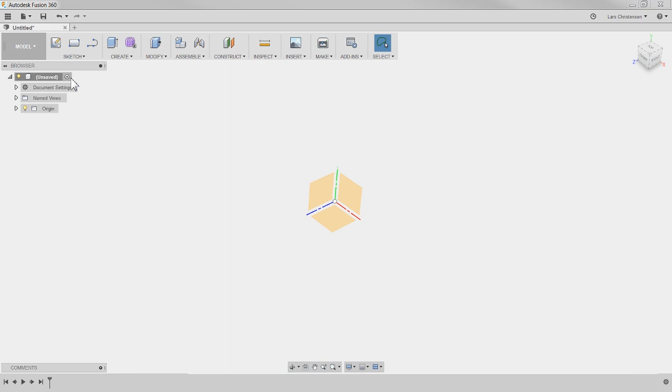So I'm going to start a sketch on one of these planes, and by default it doesn't really matter which one you select - you can do different tricks to rotate them around later on. So I'm just going to start on this plane here.

Click on that, and the first thing I'm going to do is kind of like the outside diameter of this tube here. So I'm just going to sketch a circle, and a way to sketch a circle is just hitting C for circle, just like that. Then you can look next to your cursor - you can see the cursor has a little circle on it. I'm going to snap to the origin.

I'm talking about the importance of the origin - I would always start my first sketch snapped to the origin somehow. So I'm going to left click once, and I can just scroll out, and then I get a diameter showing up. I'm just going to type in 32 - that's what I measured this diameter to be.

When I've done that, you'll see the sketch turns black, because it is what is called fully defined. The reason it's fully defined is we've given it a diameter and snapped to that origin, so it's locked in. You can see when I hover over it, I get a little icon that is a coincident icon with the origin. It's very important that you make sure your sketches turn black. Now to extrude this out in 3D space, I'm going to hit Q on my keyboard.

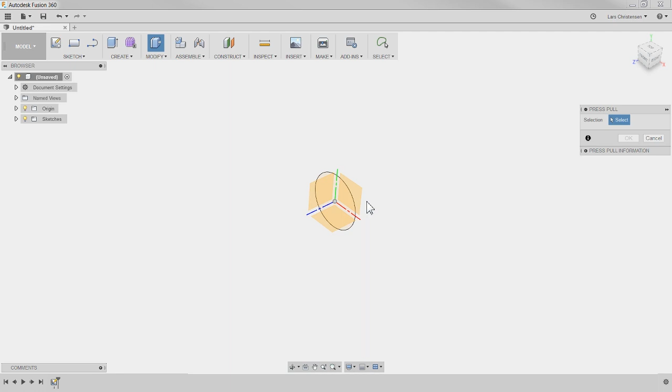That is the same command for press pull. I'm going to select the circle, and every time I see an arrow, I'm normally just dragging it. You will see that now we're getting that 3D shape.

See, we got John here, good to see you. Grant is asking, do I know anything about 3D scanning? I know a little bit about 3D scanning, Grant.

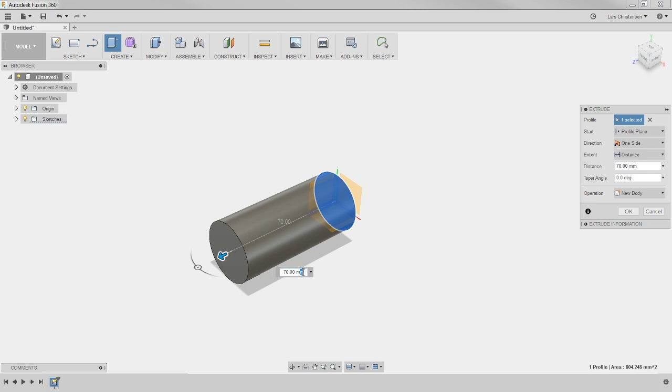You're welcome to ask any questions you have. So, ready for the length here. I measured the overall length. I'm doing the entire length of this one right out of the bat, breaking it down into two things. I'm taking that overall length and putting that in. I measured it to be 145 millimeters. Just type that in, and there you have it, folks.

Hold down Shift, middle mouse button, and we can spin the model around. There you have a tube. Not very exciting, but let's show you here.

Good to see you, I hope I say your name right. So we have a kind of tube here.

Notice down at the bottom here, we get that history, so we can go back. There's our sketch, we first sketched up the circle, and there is our extrusion. At this point you can kind of breathe a little bit, because you got your first thing on the screen. That's always the most important thing, to get one thing on the screen, then you're good to go. Now we're ready to start maybe looking at this mouth.

Now if you're fairly new, making this 45 or 40 degree cut could be a little intimidating. How do you start with that? So what I'm actually going to do is pretend that it's not 40 degrees.

I'm actually just going to create the mouth as if it were flat. Let me just show you what I mean by that, because I want to show you a couple of different tricks. All right, I can see we got Gary here.

Yep, I love to take everyday model items too, Gary, and model them up. It's the easiest thing, actually. Find something around the house and try to start modeling it. I think that's the best way to really learn CAD.

All right, so I'm going to model up this mouth, and if you're looking at it from this end, you can kind of see that the tube diameter kind of runs right out to the edge of that midpoint of the mouth here. So I'm actually going to go into the end point.

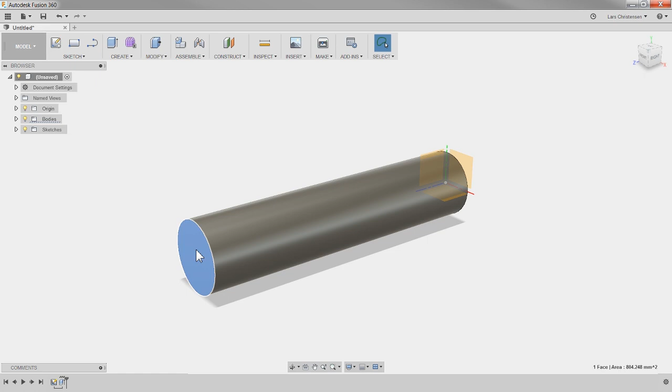So we had our sketch up here on the origin. We can see we still have the planes on. So I'm actually going to start a sketch on this face. I said before that we can only sketch on either a face or a plane. Before we didn't have a face, we only had planes, we had these three planes. Now we have a face, so we can sketch on this face here.

So I'm going to go up and hit create a new sketch, and you can see that the button is kind of clicked in, there's blue around it. I'm going to select right on that face. Now when I click here, left click, you will see that it kind of turned normal to, so now we're looking right at that face. Now this is a brand new sketch. You can see that we had our first sketch with a diameter, we extruded it out, and now we created our next sketch.

One of the best habits I think you can get into is creating helping geometry. So I know I want to snap a line into the top of this circle here, but a circle doesn't really have any endpoint, so it's kind of hard to do. But what I can do is go up and click line, and snap back into our origin just like we did before, and draw a line up.

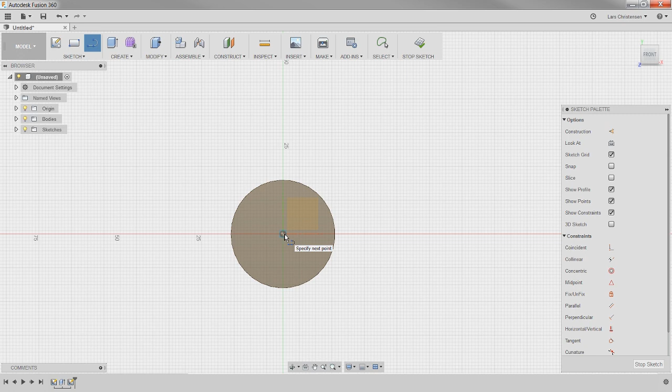You will see that I can make a vertical line up that will snap. You can see how the cursor changes, here's a cross, and then it becomes an X. See that? That X shows you it's going to snap into the top of that.

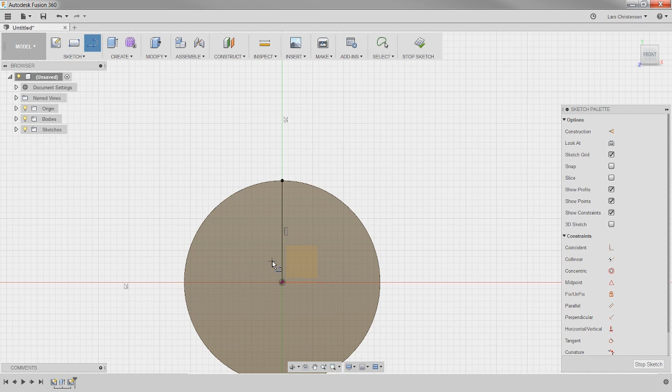So this line that I just drew is kind of a helping line for me for the top of this mouth, or whatever you want to call it. Hey Philip, good to see you, man.

So what I'm going to do here is, I think, an interesting way to do things. I'm just going to sketch a line right out in space out here, just a horizontal line going across, just like that.

Now you can see that it's ready for sketching the next line. I'm just going to hit the little green dot right there so it stops the line. So we just have a line, no length, just sitting out in space. There's nothing exciting about this line at all.

But what I can do is use these relationships down here, constraints, to attach this line to that point we just created. So over here I have something called midpoint. If I click on midpoint, I've activated that midpoint constraint. I click on the line and then click on that point. You will see that this line snaps to the midpoint of the line, snaps to that constraint.

I've talked about it in other live streams before that sometimes it's easier to kind of draw something up a little bit to the side and then attach it with these constraints.

Now, looking at this line right now, you will see that it turns black. And by the way, look at my cursor. You see how I still have a triangle, a midpoint constraint. If I want to get out of that, I can just hit escape on my keyboard. And then I have the white cursor back to the normal cursor.

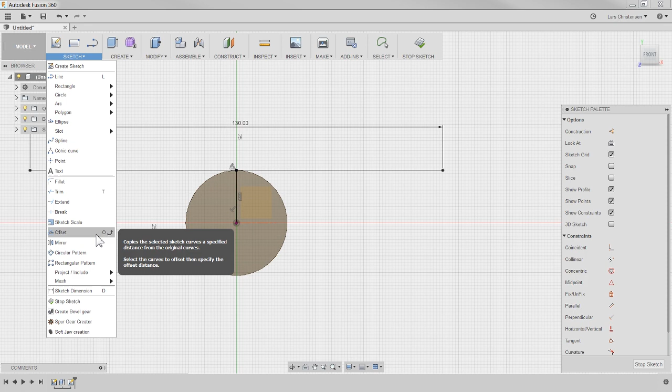One of the things we have, if we go over to the drop-down sketch here, you will see there's an offset command. I know when you're starting out, it's kind of hard to find all these different things. You will see that this one actually has an O next to it for offset, so you can also hit it as a hotkey. But I'm just going to select offset, and I'm going to select my line right here.

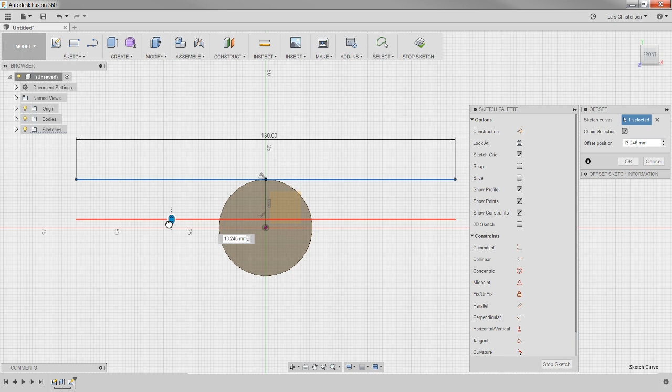Maybe not, hang on. Okay, offset—oh, I was trying to select the dimension, it was this line I was selecting. Sorry. As soon as I do that, you'll see I get an offset line, and like I said, you can drag here, and then you can type in the 20, and that gives us the width. Thank you, Damon. I need another sip of my beer, man.

Okay, so 20 millimeters, hit enter, and now that line has been defined with the 20 here. Now it's open, so I'm just going to hit line, click up here, and just snap into these two endpoints right here, and do the same thing over here.

And as soon as I do that, you can see that when it gets enclosed, notice that it kind of gets—I don't know what you call this, a tan color or something—that shows us this is a closed profile.

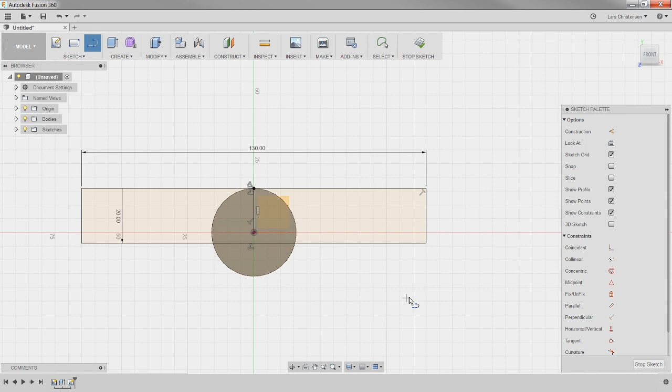Now I'm just going to hold down Shift and middle mouse button and move so you can see where we are right now. So we started out by sketching on this plane, we extruded it out, we start a new sketch on that face, and you will see that face is sitting down there. Again, to rotate, Shift and middle mouse button.

Okay, so this is good, pretty good. We got kind of like the shape of the mouth. Now I'm going to go in and extrude this.

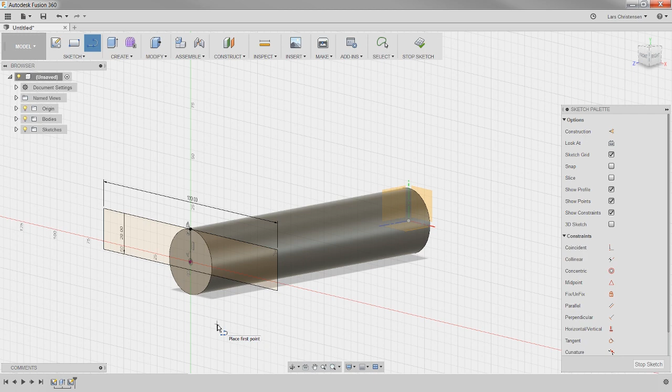So I'm going to hit Q again, and you'll see the software breaks it up into 3 different sections for what I want to select. I'm just going to select the 2 outer shapes I want. And just like before, you can see I get an arrow, and I can drag it one way or drag it the other way.

I hope I'm not the only one just sitting here drinking beer. Maybe I am.

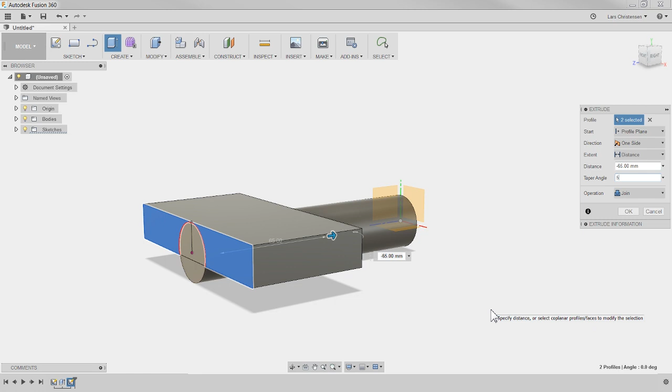Earlier we got a question about adding taper angle to this part here. In the extrude command, there's a tapered function you can activate. This is a good function. However, you'll notice that if I put in, say, 5 degrees, by default everything turns red, which tells me it's a cut. That's the operation type - you can change that back to join.

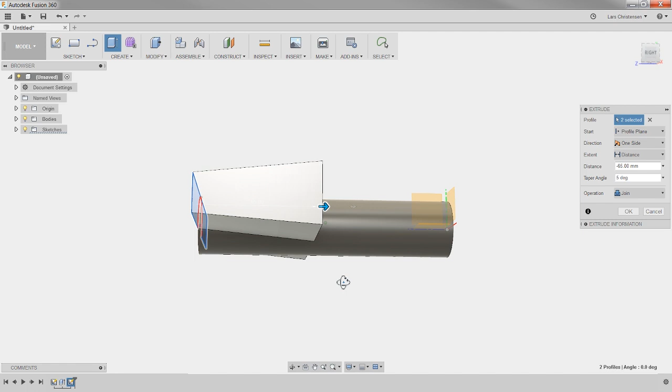But what you'll see happen when I do a taper like that is it applies it to all the faces. If I go -5, it becomes narrow, and you can see it applies to every face it can - on top, on the bottom, even in between. So even though I want to add some taper to the outside of our part, this taper command isn't really great for this, but that's okay.

So I'm just going to turn it back to 0. Now it's all straight, and I'm going to go a little bit further with this one. I should probably measure this - I'm just going to go to about 75, that's probably okay. And I'll hit OK.

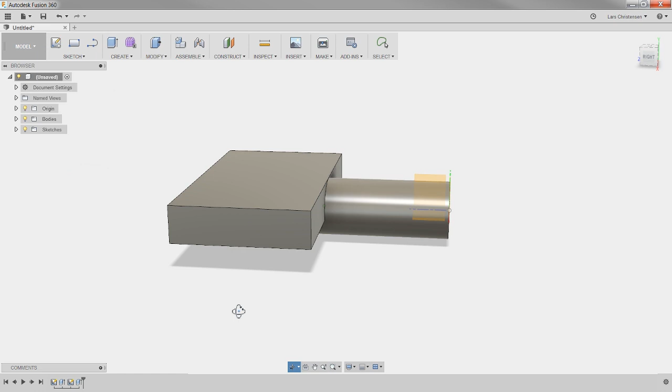So what do we have now? We had a cylinder we extruded forward, then we created that sketch, then we've now extruded a block straight backwards. Now they're attached, the two, because we had the join function.

And you can always go in and edit these - if you right click on them down here at the bottom, you can click edit feature and go back in again. So because we selected join, we joined the 2 pieces together.

Darren just got home. Good, you got home, man. And he got a beer too.

Rob asks: so if I hit C, snap to the origin, and use the mouse button to set the dimension, it stays blue - no lock symbol on the dimensions. But if I enter the diameter and hit enter, the lock icon shows up and the circle turns black. Note to self, use the enter key. Yeah, that's probably a good catch - that's probably something I am doing out of habit.

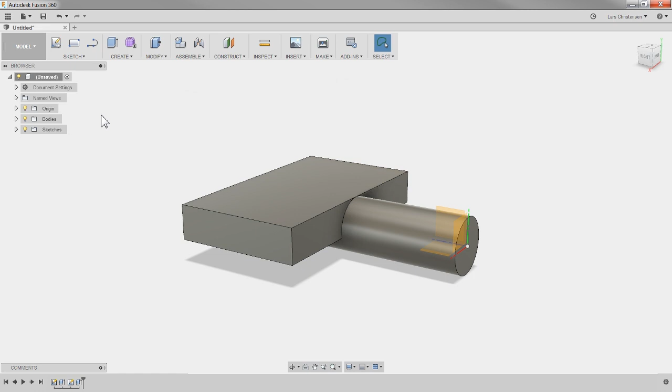So if we go in here, start a new model, start a new sketch on a plane, hit C for circle, make sure you snap into that origin, put in your dimension, and hit enter - you actually have to hit it twice to get it to snap. That's a good note there, Rob.

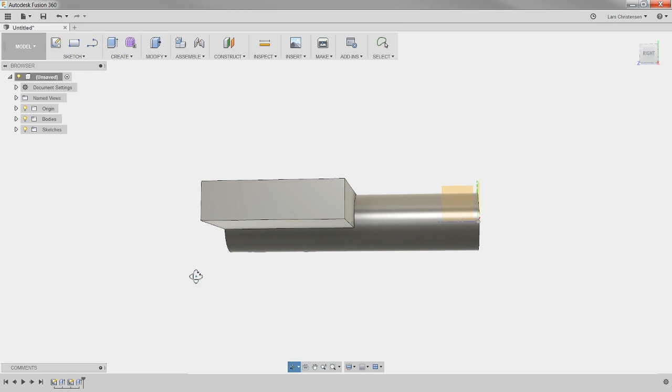Okay, back to our part here. So that's what we have now. It's still what we call one body because the two are kind of joined together. And you have these folders up here - we can talk more about these if you want. If I hit the little arrow, right now we have body 1, but it's these two combined. I'm going to leave it open because a little bit later it's going to become more than one body.

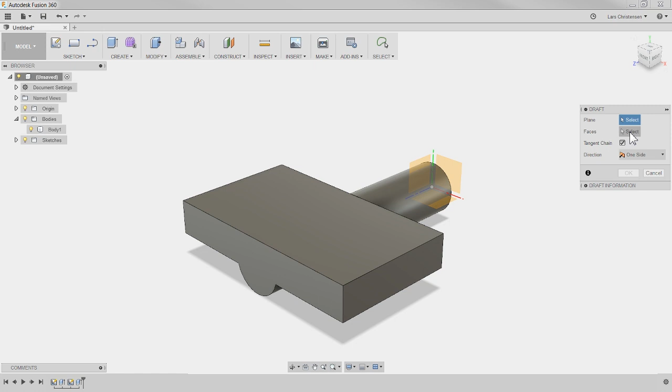Now coming back to the taper portion - I showed before how we could taper things in the extrude, but I didn't really like the result. Be aware that if you go to modify, there's a taper or draft function you can apply there. It does kind of the same thing - taper or draft, it's the same thing. So if I hit draft, it's looking for a plane, or what I'll call a zero surface, where the angle is going to come from, and then you can select the faces you want to apply it to. So where the other function applied it to all the faces, this one we select the zero plane.

I'm going to select this plane back here, and then the faces - I'm going to select this face. Then we just hold down Shift and the middle mouse button and drag around to hit the other face. And now I can actually add a draft just on those 2 faces.

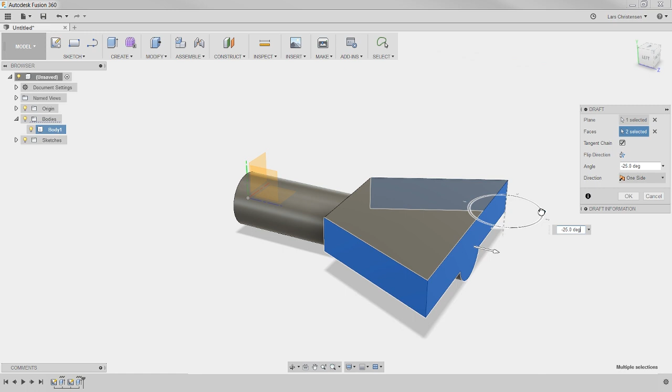So the taper in the extrude can be kind of handy, but if you want to control what side you want to use, then you want to find this draft command instead. I'm going to hit OK, and you will see that now if I spin it around, Shift middle mouse button, we got some draft to the part here. I think that is really useful.

Now you might be tempted right now to start worrying about creating the hole that goes all through the funnel, because right now we kind of have something that looks like something, but I'm actually going to wait with cutting the hole through the part till the very end.

William is asking, while on taper, is there a function command for a standard Morse taper? Well, standard Morse taper, is that 7 degrees? I'm not sure. I have the machinist handbook, I could look it up.

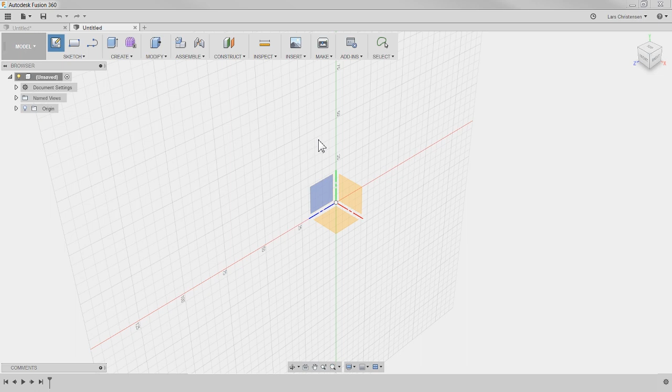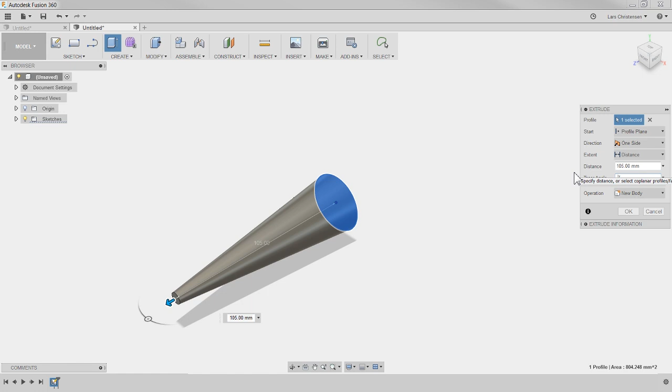So if I open up another document, let's go back and do our circle, C for circle, click here, 32, hit enter, hit E for extrude, and drag this part out. If we added - I think this Morse taper is 7 degrees - if I add in -7, whatever Morse taper is, that would be that.

William says various tables are available. Yeah, that's true, right? Absolutely, you're right. MT1, MT4, yeah right. I think if you're having a drill, is that normally MT3 maybe? I can't remember, but that's how you would have to do it. There's not a command where you can say MT3 and you get that.

You would have to model it up just like this by putting in the taper angle. And then if you did a 2D drawing of this, you probably would have to put a note on it or something like that. Good question, and this is exactly what I want to do with these live streams. Absolutely awesome, fire the questions away, and I'll do my best to answer them. This is absolutely just you and me going through this.

You're the best, William. All right, let's talk about this angle here. There's a couple different ways we could achieve this cut, but I wanted to show you a command I think is really important - a couple commands I want you to know exist, even if when you're modeling the part you're working on, if it's something completely different, sometimes it's hard to see how you'd use it. But it's all about having the right tool belt. So we're going to make that angle there.

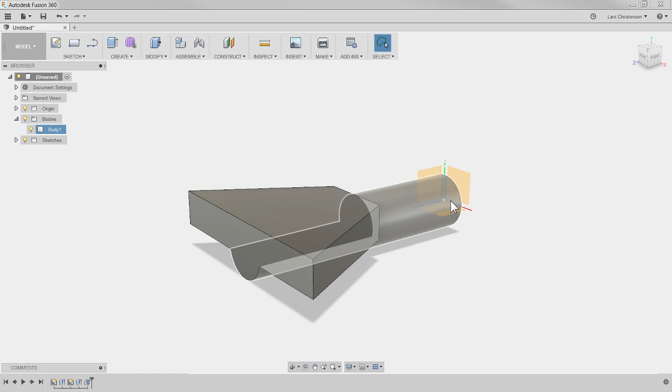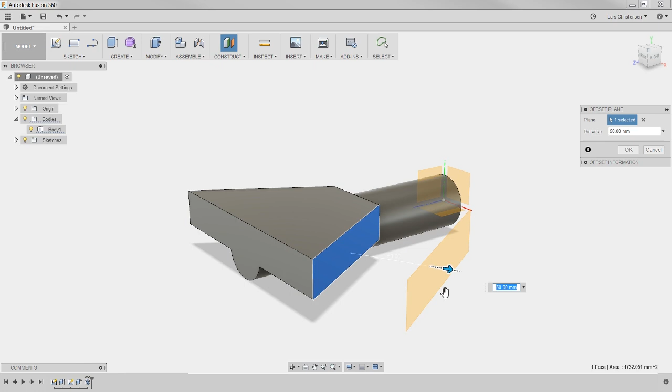Now, I started out talking in the very beginning about using the planes in here. And if you watch any of the other live streams, you know that up here you can create offset planes. So if you can't find a face to model on, and you can't find a plane to model on, you can always create your own. The offset plane up here is pretty useful to have. The way it works: if you select a face, you can create an offset plane from that face. So many times we will use that. But there are other tools in here.

One of them is a plane at an angle, and this is extremely useful. There's a little text box next to it here, to the right of it - hover over it, should give you an explanation. If it comes back up again - of course it doesn't - but what it's looking for, if you select that, it's looking for a line.

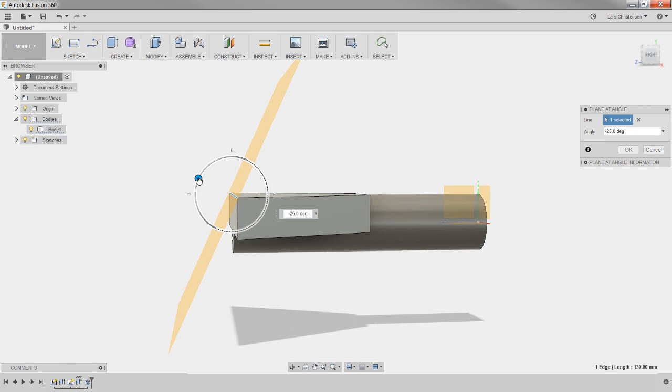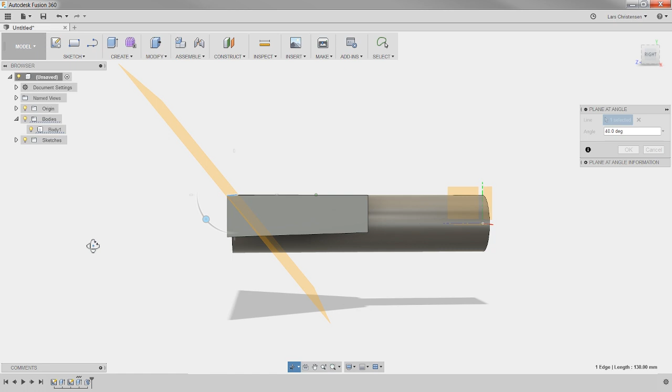Now check this out. If I select that top line of our model right there, it shows up with a plane that actually looks a little bit like an offset plane, but it gives us an option to rotate that plane around that line. This is one of those tools that you can beat yourself up trying to figure out how to do something like this, but that is really a nice tool. So I'm going to place it at 40 degrees here, so it's cutting through there at 40 degrees. You could also type it in here, of course. I'm going to hit OK, and that plane is right there now.

So I would recommend that you take 10 minutes and just - I actually did a live stream on YouTube about this.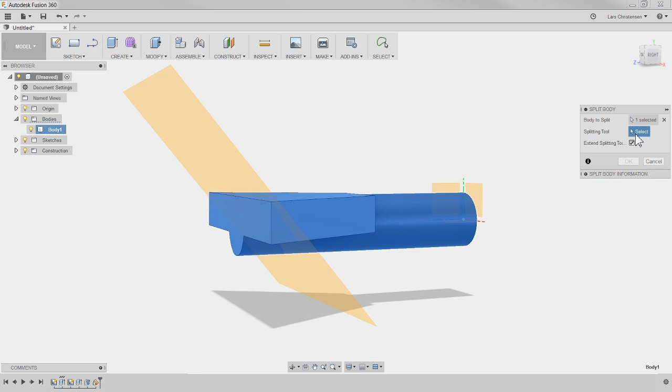Now we can go in and say we want to split that body. It says body to split, so what do you want to split? I want to split this part right here, the body. What is your splitting tool? I click on select to make it blue, meaning it's highlighted. The splitting tool in this case is that plane we just created. You will see that Fusion creates a round boundary shield that goes through that.

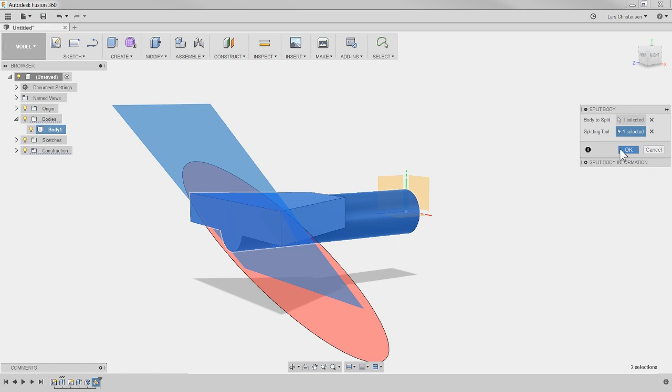When I hit OK, nothing will really change on the screen, but you will see that I'm now getting a second body. So I'm going to hit OK. Like I said, nothing really changed on the screen, but we got two bodies, because we cut right through that body with that plane.

Now, I can hide this construction plane by hitting the light bulb, and that goes away. You can actually see that we do get a little bit of a line segment here.

Now, you might be tempted to delete this, to right click on it and hit delete. But if you do that, notice what happened. Everything kind of went back to where it was before we cut it. Wait a second. Let me just undo that, hit the undo up here in the upper left. So now we're back to where we were before, two bodies.

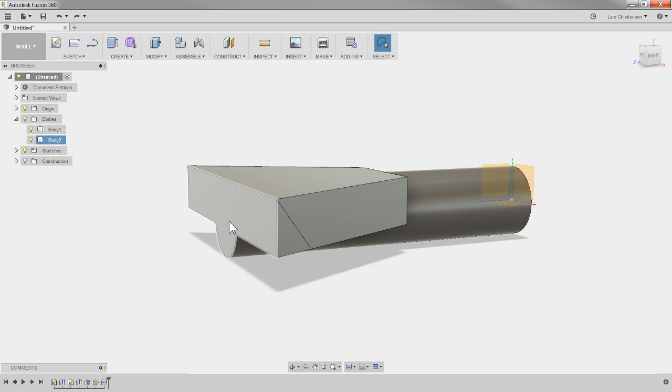So you have a tendency to look at this and say, I don't want this body, body number 2, we don't want that, it's waste. Right click and hit delete. But then it's like nothing ever happened, like all that work for nothing. What the heck? Undo again.

What delete does, and it's actually pretty sweet, is Fusion looks at the feature you're trying to delete, in this case this body, and it says how can I heal everything back up. Now in this case it's not really giving us the end result, but if you had a hole and you clicked on the inner face of the hole and hit delete, you will see not only would the hole disappear, everything would merge up. So that's what delete does.

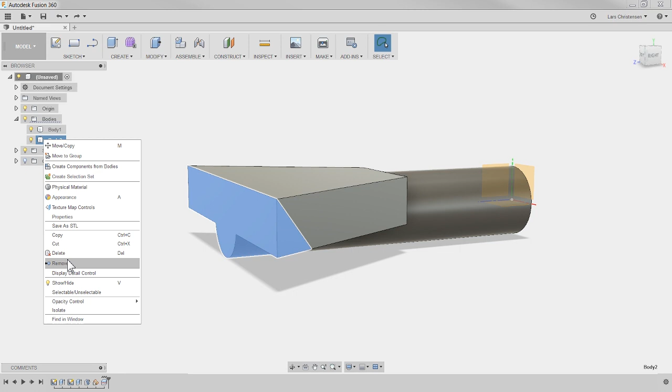So instead of hitting delete, I'm actually going to hit remove. Click that, and now you will see I get what I want. That piece disappeared and we got an angular cut.

And what is neat about this is that it actually shows up here in the feature tree. Here's our split and here is our remove as a feature. So even though we removed it, it's still remembering that. If I roll back before that, it's back. So that's kind of nice that we have this kind of history here.

So we're getting there. This is definitely getting closer to what we want.

Now, the next little trick I want to show you, have a sip of my beer. It is Wednesday evening, 8:35 where I am, so beer is allowed.

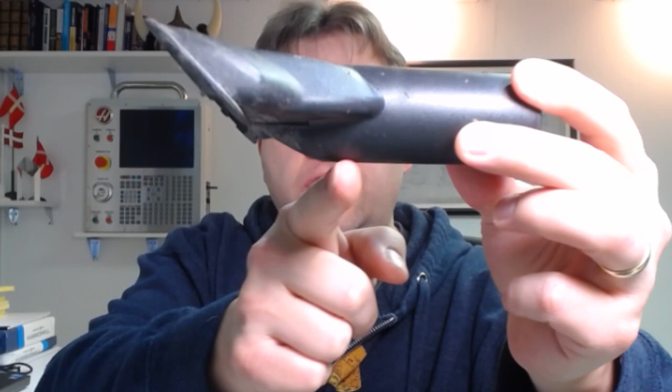Another thing I think it could be interesting to show you how to model is, you see this here, this portion down here has a radius on it. Right now, if you look at our model and go to the side view, you will see that that is kind of part of the cut. So we kind of need to bring that back and bring a radius down a little bit in here.

So this is another one of these that when we're looking at the part with this curve here, that's pretty simple, right? Give me a grinder or something and I'll take that out. But when it comes to modeling it, it becomes a little bit like, okay, how do I do that again? So let's take a look at that.

So what I'm going to do is place myself on this side view here. I kind of like looking at it from the side. And we talked about before, where do you want to sketch? You either sketch on a plane or a face.

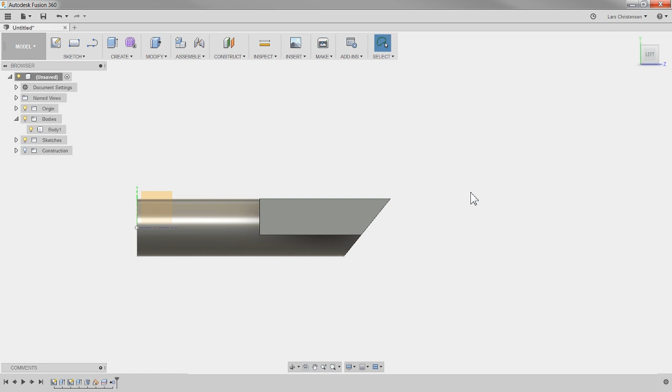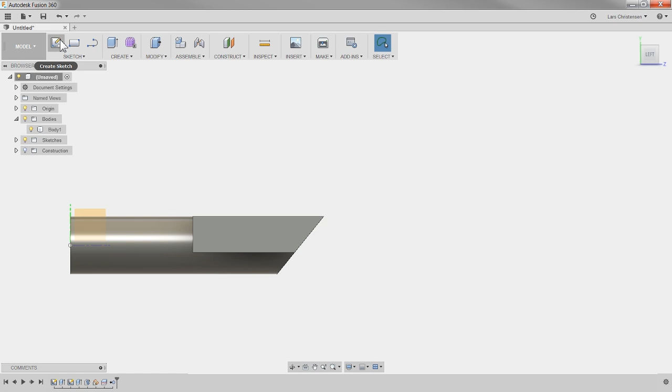Now, because I have a plane from the origin, it's a small plane, only a little small, but it cuts right through the center of our part, I actually think I want to sketch on that. So let me go back to that left view, say I want to create a new sketch, and I'm going to select on that plane. So even though this is a small plane, I can still sketch anywhere I want here.

So that's all good. Now, I want to create an arc that goes from here and kind of goes down to the bottom down here. But the bottom down here is like a development of the roundness going the other way, so there isn't a straight edge down here that I can select.

Well, I'm going to show you one of these tools you need to be familiar with. Project, hit P on your keyboard, and you get this project command. Now, I cannot project this bottom edge because there isn't really any bottom edge, right, because it's a curve. But what I can do is select the two other ends of that curve right there. Just to show you, I selected this edge and this edge.

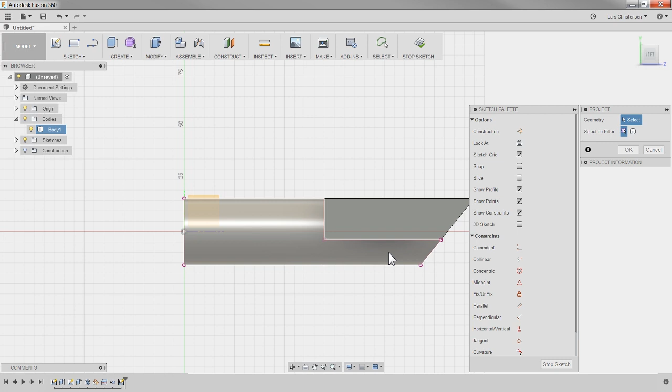And if I hide the body for a second, what I got is a purple line here and a purple line here that I kind of borrowed from that area. And I could also, while I am in project, select this line right here to project that one too. So if I hide the body again, I got that line there.

So I'm borrowing those edges from the body, from the model, and borrowing them into the sketch we are sketching on right now. But these lines for me are really just helping lines, nothing else.

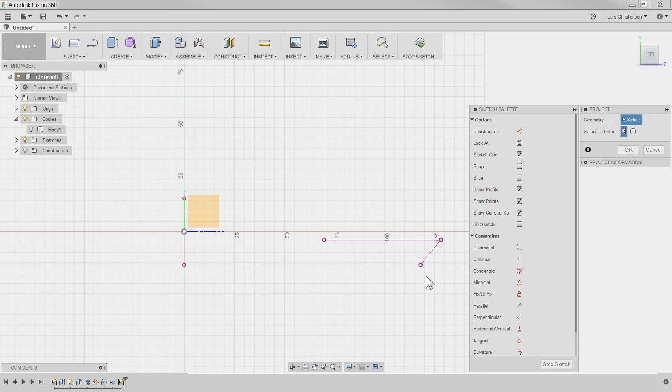So now when I've done the project, I can hit OK to that. I'm still in the sketch command, you can see that because of the sketch palette here. I'm going to close this off, hit L for line, or click on the icon, and just close this off here, just like that. So now we've got that line, and then we're going to create an arc between here.

Now I'm going to go up and click Sketch, go to Arcs, and I'm a big fan of the 3-point arc. The 3-point arc is awesome. You just need to know in what order you should select the points for the 3-point arc.

So the idea is you select the two endpoints and then the curve. So the two endpoints, I'm going to place an endpoint down here, and again, I'm going to make sure my sketch snaps to that line. That's one endpoint. And over here, I'm going to place my second endpoint, and then I kind of get the bow out of this one.

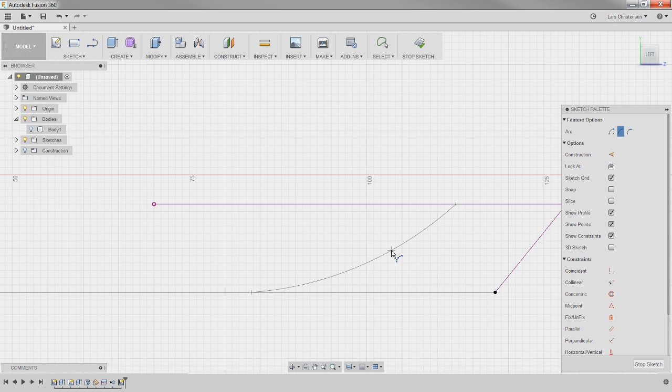Now you will see if I zoom in, if you look at the left side of the arc, the first point I selected, see how I get a little tangent symbol right there as I'm moving it over. And I do want it to be tangent, so I'm just going to click while I have that icon, so left click to place that arc.

Now you will see that though I got a tangency here, the line is still blue, and that's of course because it hasn't been defined. I'm just holding down my left mouse button as I'm dragging this, so I can fully define it.

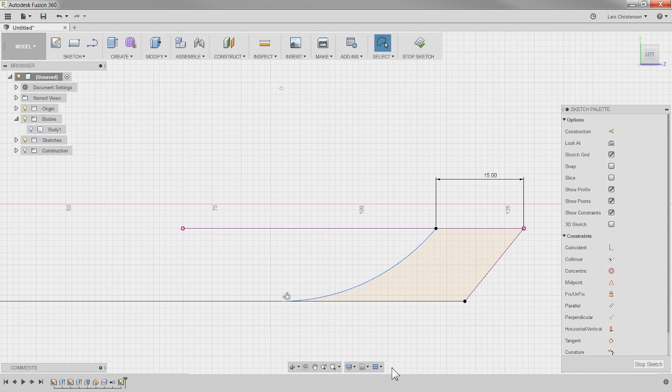So one way could be to say, all right, we need a dimension, so D for dimension, between this endpoint and this endpoint, and I'm just going to make up a number. Let's make it 15. That's good, but you will see that it's still blue. Well, we also need to define the radius of it, so you kind of have to go through this process. I'm going to hit D again, select the arc, and we can now place whatever kind of radius we've got.

So I'm really working in this sketch environment with my body turned off. Now, if I turn the body back on, you can see how this all falls in relationship with our sketch. So now I'm going to hit Q again, and I really want to select that sketch area in there. But notice how my body is kind of hard to select.

I can select it right there. You see how I get the outline right there? If I move over, I get that face. If I move over, I get that face. So sometimes you can sit here and try to see if you can hit it right around there.

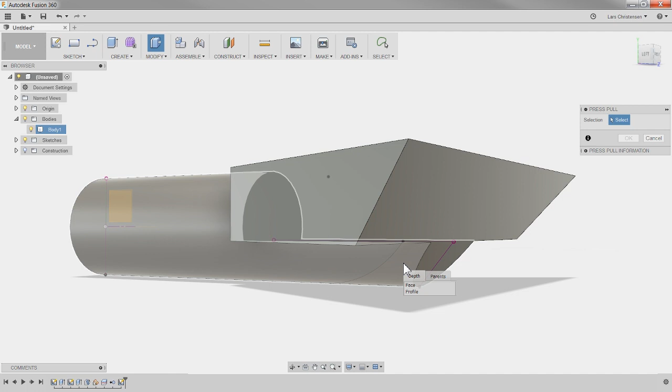Another thing you can do is hover over about where you want it to be, hold down the left mouse button, and you get this little dialog box, and I can select if I want the face or that profile. So that's another little trick.

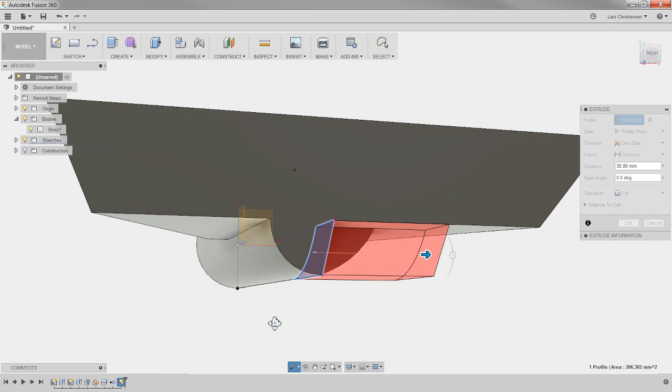So I'm going to select that profile, and you'll see I get a little arrow showing up. Like I said, every time I see an arrow, I drag it, and you'll see we get red, which means we're cutting, which is perfect, but it's actually only cutting in one direction. I want it to also cut over here. So be aware of the different settings.

So over here, instead of one side, I'm going to say symmetrical, and now you'll see it's going to go on both sides, symmetrical cut. Probably give it some kind of distance, maybe 30 might be okay, and hit enter. And now we got a nice curve cut right there, going through there. So we got that kind of curve.

So I hope that this is somewhat useful to see this.

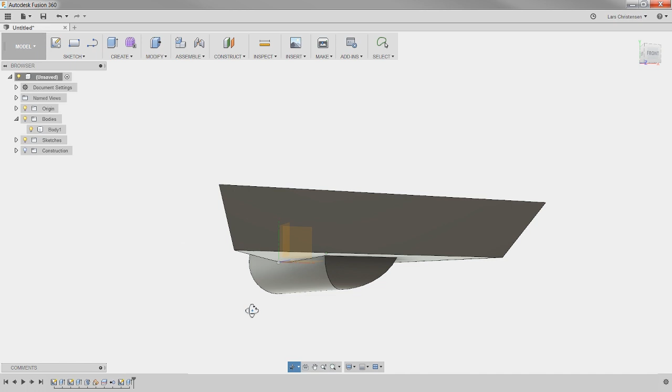The next thing I want to do here, and we're almost done with this part, is add some fillets to the part, just to round the edges. When I do fillets, I normally wait somewhat towards the end. I like to break them down into different sections, because even if you need the same fillets on the entire body, many times customers will come back and ask for certain fillets to be changed.

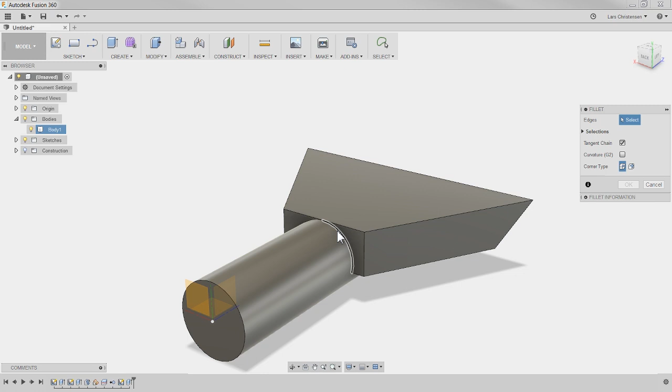So for example, let me show you what I'm talking about. If I go up here to Modify, you'll find Fillet. You could also hit F. So I might select this edge, hold down shift middle mouse button, this edge, and also select this edge and this edge here, and then give it some kind of radius, because these bottom edges and going around this one might get one kind of fillet. So just hit OK to that, and you'll see we get the fillet command down here.

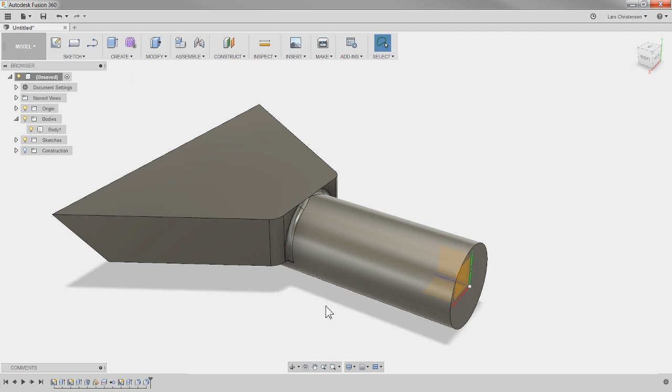And then I will go around and do the other fillet. So maybe another F for fillets, select this edge and this edge over here. Maybe I make those 3, or maybe we make them 6, whatever kind of fits within that. I have a tendency, when doing this kind of stuff, to break down the fillets into multiple commands. It also makes it a little easier for the software to actually solve this. So I'm just going to go around adding some different fillets.

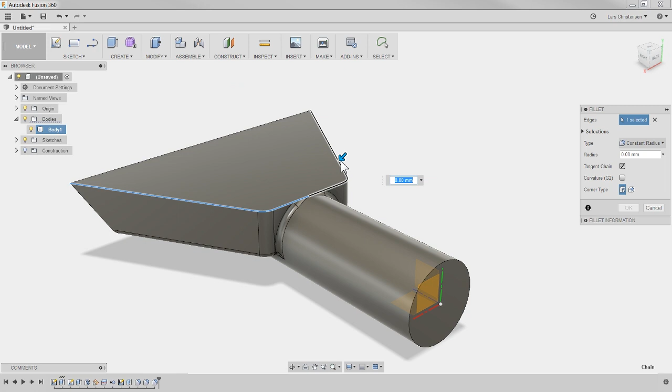F for fillet, maybe select this section and this section. Let's make that also 2. And then we can just leave the rest of them there, because the next thing we got to do to finish this up is add the hole, right?

We got to make the hole. And if you watched last week's live stream here on Facebook, you know what command I'm going to use for this. I am going to use this shell command for this. Now the shell command is pretty cool. Let me just show you first.

If I click on the shell command and I just select this back face here, it gives me a thickness, and I know I need 2mm thickness. And I'm just going to hit OK. What Fusion just did was, by selecting that one face, it added 2mm all the way through the part.

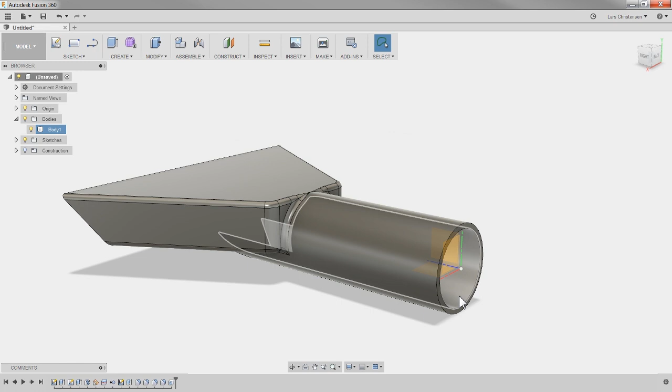I can show you that by going to Inspect, Section Analysis. Let me select the top face here and just make a cut right through there.

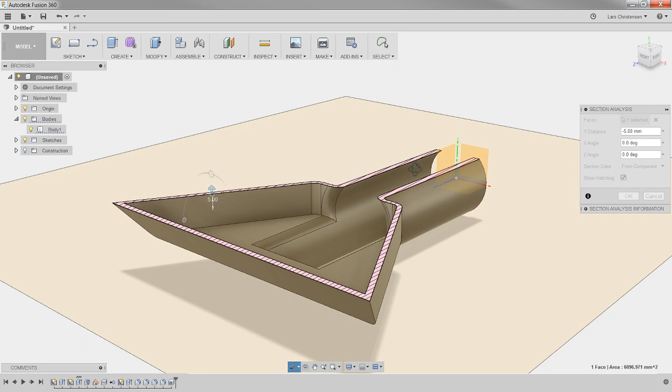Check this out. It literally made a 2mm thick wall all the way around, hollowed it all out. So that's how you will make a bottle, for example, like the beer bottle I'm having next to me, is literally just select the top where you're drinking out of, and everything gets hollowed out of it.

But you can actually select multiple faces. So if I go back into that feature, instead of selecting just that one back face, I can select the second face, and that will actually open everything up. Now we've got that hole right through that. Hit OK, and now we have pretty much our funnel there.

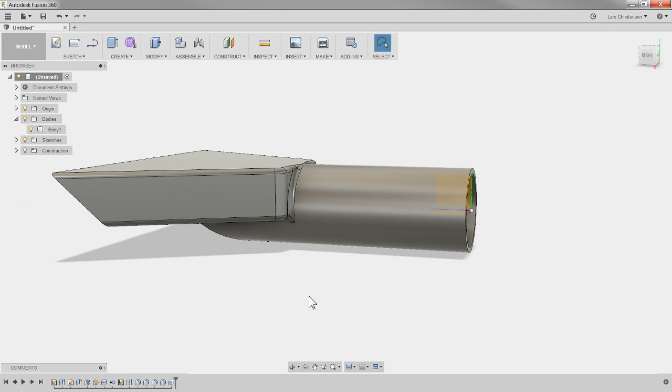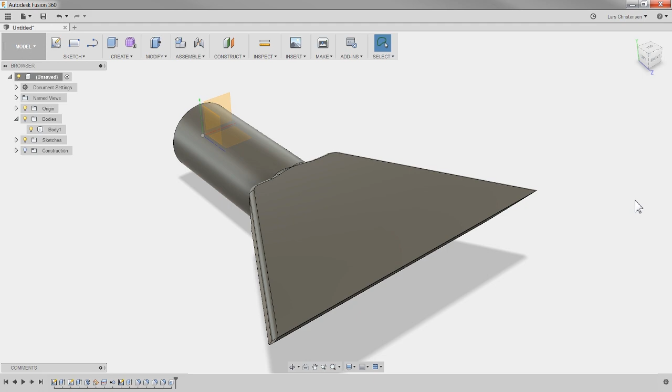One of the things that's pretty cool, hope you can see, is that the radiuses out here are following along with the radiuses inside of it. So it's keeping that constant of 2mm. Let me go back into the section analysis so I can show you again. You can now see it's keeping that 2mm all the way through. It's a really nice command to know, this shelling command.

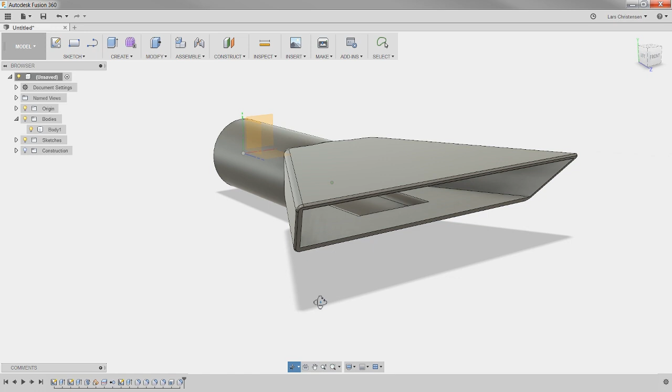The last thing you maybe wanted to do now is add another fillet, adding fillets to the inside or the outside, whatever you like to break those edges down on your part. But really, really nice feature.

Now that section analysis also, I used that top face, but you can actually also select planes. So I can select that center plane, and you can now see half of this part here. So how we just made that curve, now we have the same thing inside of that. That lives over here in the section analysis, you can actually turn the light bulb on and off. Now I'll hit OK to it.

Last thing I'm going to do to this part now is turn the origin off, we don't need that anymore. Right there. And then you could go ahead and add the appearance to it, so we could right click out in space and go change the appearances.

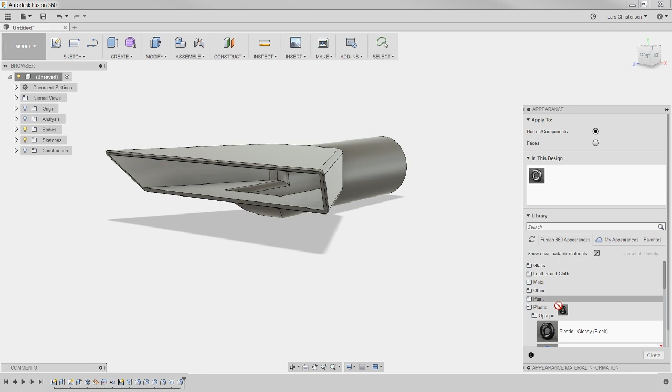You will see there's a lot of different appearances inside of Fusion. I don't know why my menu is so narrow. There's plastic, there's opaque, and we can just drag that up to over our steel here, and we now get that funnel looking like a plastic object that we could do other things with.

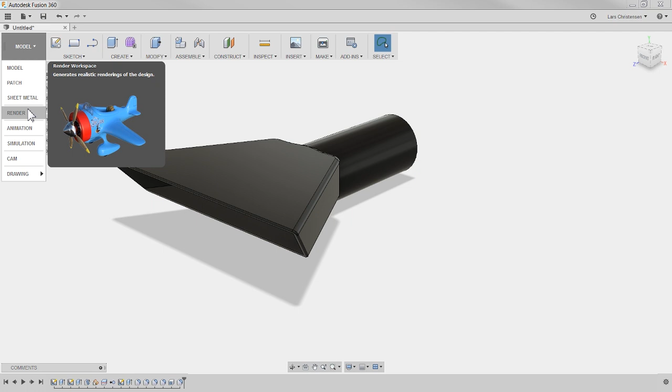We could go into the render environment. I'm not going to do that because that kind of slows my livestream a little, but you could render it out, right, so it looked like real life.

You could also go up to the make menu and go to 3D print. That was kind of the whole idea with this, where you could now refine it to the quality you want. We talked about that last week with STL files, and then you can use your preferred print utility. I prefer Meshmixer, that's what I will normally select. So it's like our model here, and then you could go into the print environment to 3D print that out.

Michael asked a good question: as a best practice, can you have too many sketches? I don't think so, Michael. I really think it depends on what you're trying to model up, because I have seen models where when you open up a sketch there's just way too much going on. So I love this, that's awesome.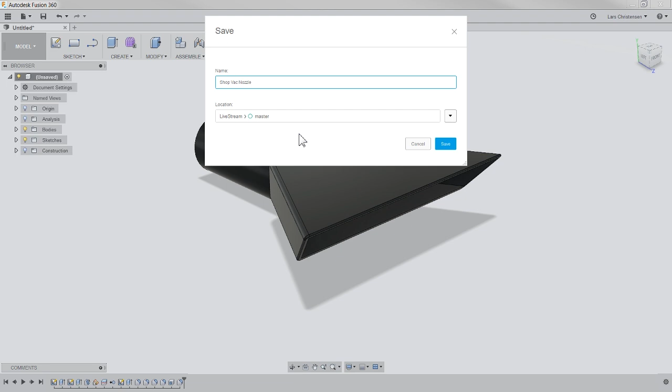So now that we're finished with this one, let's save it. We're going to go up to the save icon, click save, and give it a name, we'll call it shop vac nozzle. I think that's good. We can save it wherever we want in our projects, just going to save it in the livestream one. Hit save, so now it's saved there. If we hit the little 9 boxes out here, you would actually see that I had already modeled one up. I don't need that one anymore, I can right click and delete that.

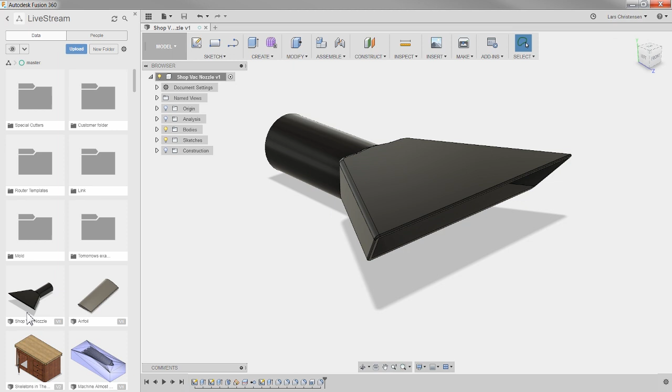So now we have this one saved here. One of the questions I got was how to open these up again. So now I have saved it. Let me just cancel out. To open this one up, we just double click on it and it should open up. Oh yeah, that's what William asked earlier - please close the project and open it up again. So that's how I would do it, save it in there and then you can open it up.

One trick I want to show you - I'm sorry Michael, I'm coming back to your sketch question in a second. If I go out to my root out here, many of you guys are probably like me, that you end up having a lot of different projects and it can be a little bit difficult to do housekeeping.

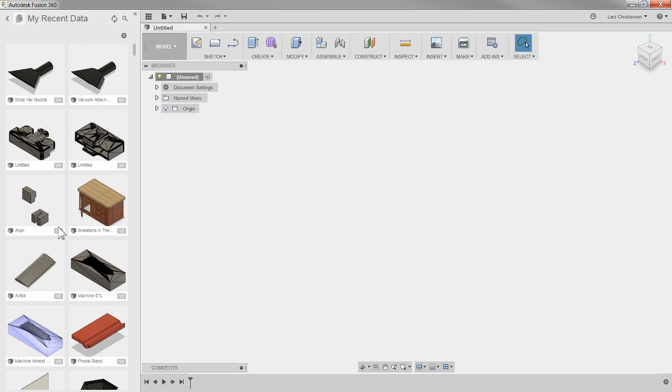Make sure you know that at the top there's a recent data section. I use this one quite a bit, and I know a lot of other people do too. Here you can see the recent files that you have opened. Sometimes it's easier to do it this way than trying to find whatever folder you placed it in. So when you go to open this up, here's our shop vac nozzle. You can either double click on it or right click and say open, and then it should open up.

William was saying it keeps taking him to the browser when he does that. I am not 100% sure about that - send me an email about it, or maybe the better way is to go to Google and type in Fusion 360 support, and then post that to the forum. I'm not quite sure why that is, William.

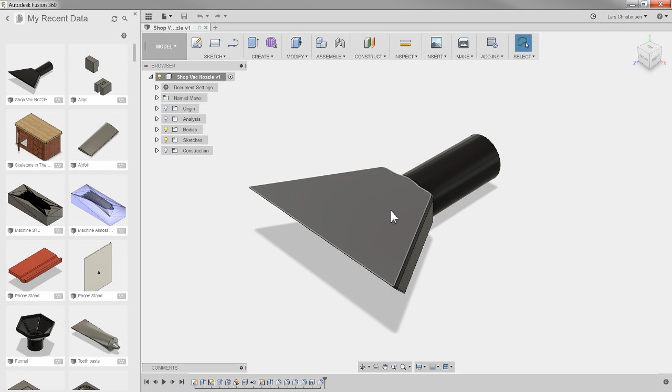So my point is, to go back to Michael's question about too many sketches - this is all great that we modeled up this little shop vac utility here. Now if somebody else gets this model and has to figure out how the heck this was modeled up, that is many times the biggest issue.

If you have a cluttered sketch, and you've never seen this model before, you go to the first sketch. What I many times will do, if I get a model I've never seen before, I will go down here and left click on this one. It's going to take me right back to the beginning, right? And then you can literally play through how it was modeled up. This is going way too fast to see anything, so now we'll just click on this one over here.

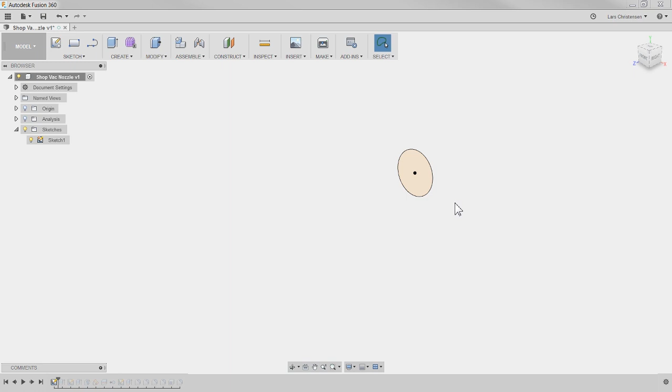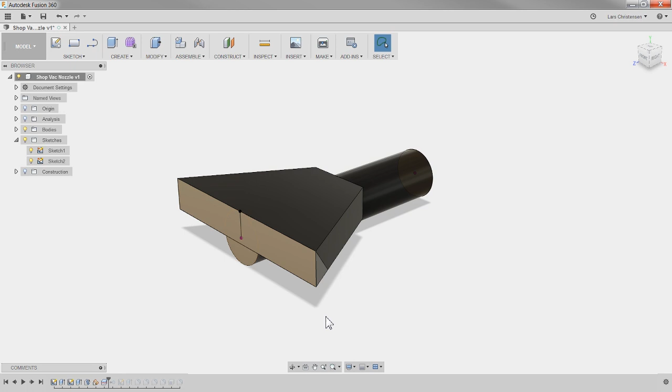So there's a sketch. Now we can't see the sketch because it's hidden, but if I turn on the light bulb - if you had a sketch, Michael, that had a ton of things in it, I don't know what the heck really does what. So I would actually rather have more sketches. I'm like, oh okay, so he extruded out a cylinder, then he created another sketch, or he created a rectangle, he extruded that out, right? He did the draft, he made some kind of a plane, he split the body, and then he went ahead and removed that portion, and then he created another.

Cut down here, and so forth, right? So you can kind of play through down here and see where it is. I don't think you necessarily can get too many sketches, and it also really depends on what you are modeling for. If you know that nobody else is ever going to model your part, Michael, or no one's going to see your model, who gives a hoot, right? But if you've got to send it to a customer, then it can be a good idea to sit down and think about what the customer would come back and ask for in changes.

Rodrigo asked - I hope that's how you pronounce it - could I do an example on a car panel? So you're talking about like the dashboard? That's probably not for these Facebook live streams, I really try to do these as just beginners content. Now we've been here an hour and I want to make sure I cover as much as I can, so I'm not trying to get into crazy shapes.

John asked, with multiple parts, how do you save only one of them? You don't just save one single component. If you are in a situation where you want to only save one component, then you probably want to work with the part outside the assembly. So what do I mean by that?

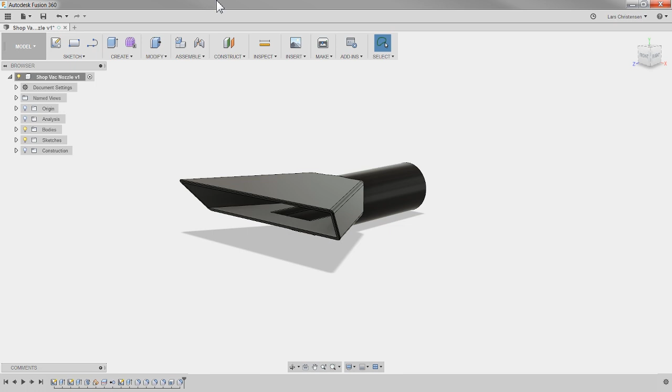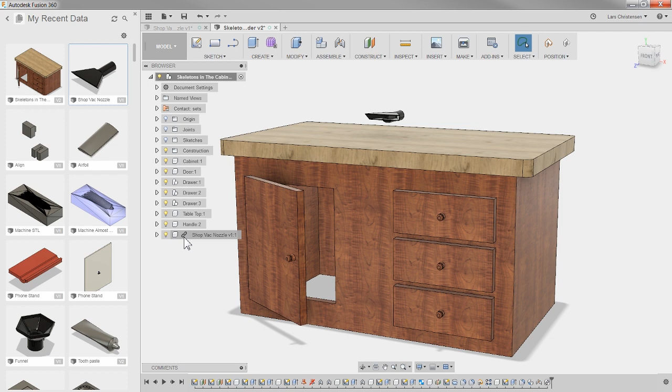I could take our shop vac here right now, right click, and say I want to insert into the current design. That would mean it's now brought inside of this cabinet file. When I do that, you'll see our nozzle gets a little chain link, which means I cannot modify this file in this assembly - I'd have to go out to that specific file and modify it out there. So that assures I can do things in here, I can save this all I want, and it will never mess with the shop vac nozzle because that was a linked component.

I don't know if that quite answers your question, you let me know. William was asking, how would you draw a tube and then roll it into a circle with a gap where the ends meet?

I'm not sure if this is exactly what you're asking, William, but there's a command called the sweep command that will let you do that, I think, if I understand you correctly. Let me open up a new sketch, a new part file.

Same plane, let's do another circle, and let's make it 32 here. You could actually have multiple sketches in here. I could also make another circle - that was 30, because that's actually kind of how this ended out. And then if I hit Q right now, I could extrude out a 2 millimeter tube like this.

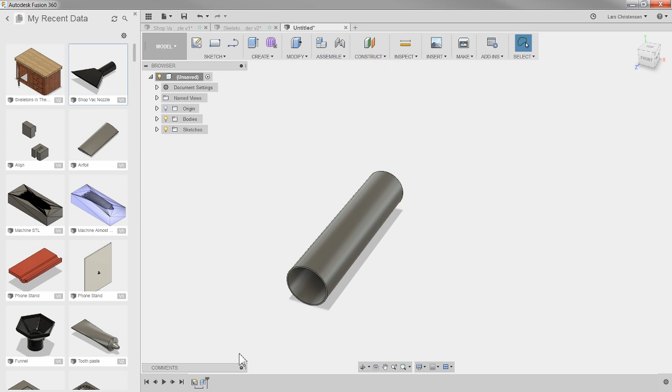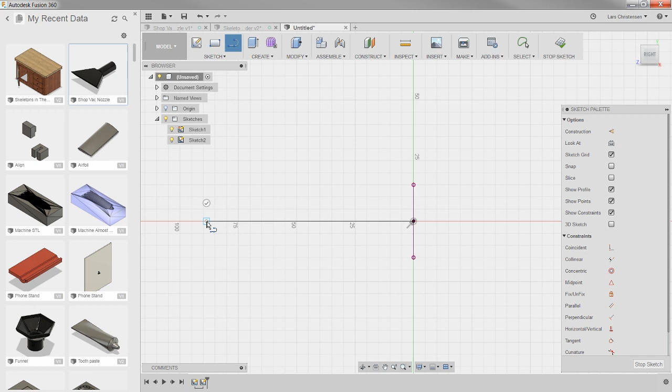Instead of using the extrude command, turn this sketch back on - that was one sketch to do the two circles. I could start another sketch, and this one I'm going to start on another plane. Then I could create a line that goes out here, create an arc like that, and create a line up like this. So now what I have here is our two circles and then an arc here.

So I have two sketches. If I use that sweep command, I can select that circle there and then select that other sketch as a path, and that will give me what I hope you mean, where we're kind of rolling that tube around a corner like that.

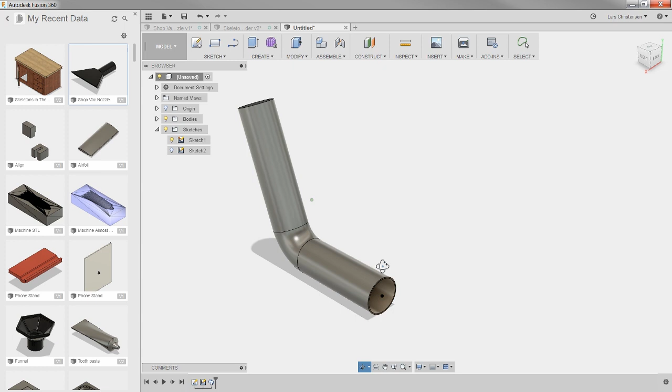Sax here - great video, I'm still a beginner but I've learned a ton from your short time. That is absolutely awesome, Sax, really appreciate it. That's what these live streams are about - it's all about adding a little bit of value to the Fusion 360 experience. I know how it is, man - I still remember the frustration of going down and buying a CAD for Dummies book because I was just so frustrated with it.